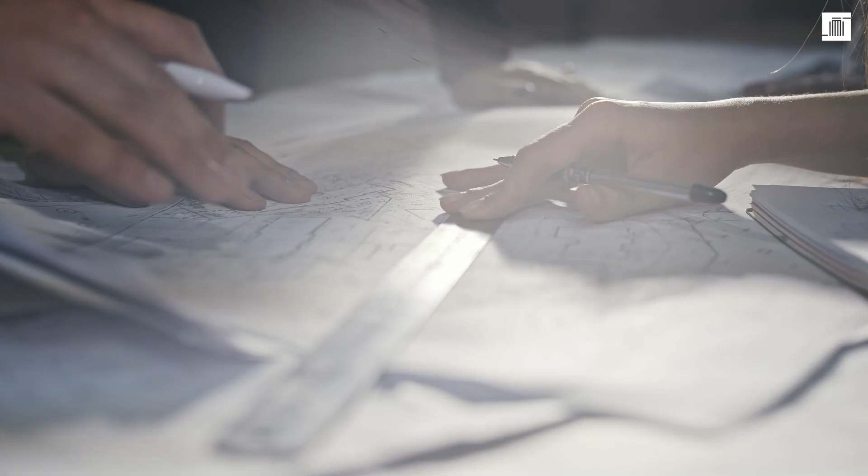The main objective of the IMIP project was to design, validate and implement an innovative construction system based on natural bio-based materials, basically wood and cork, to improve the energy efficiency in public buildings.

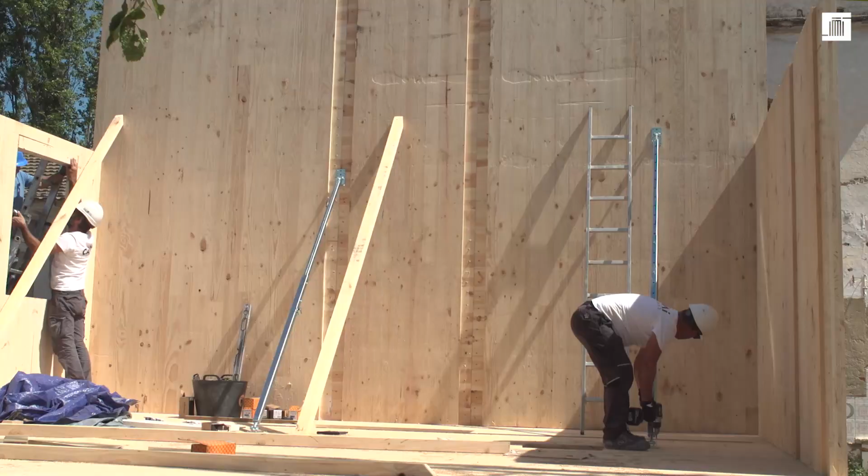Wood and cork are local natural resources whose technical characteristics make them excellent raw materials for construction and rehabilitation. Wood is a lightweight biological material whose industrial transformation and production process emit fewer greenhouse gas emissions than traditional construction materials, but also stores atmospheric carbon.

Wood species available in the Sudoe area for manufacturing construction products are generally softwoods, especially several pine tree species, but the most common one present throughout the region is maritime pine, Pinus pinaster. Pinaster pine is a fast-growing variety, so regeneration of the territory occurs quickly. Therefore, it is a moderately resistant wood.

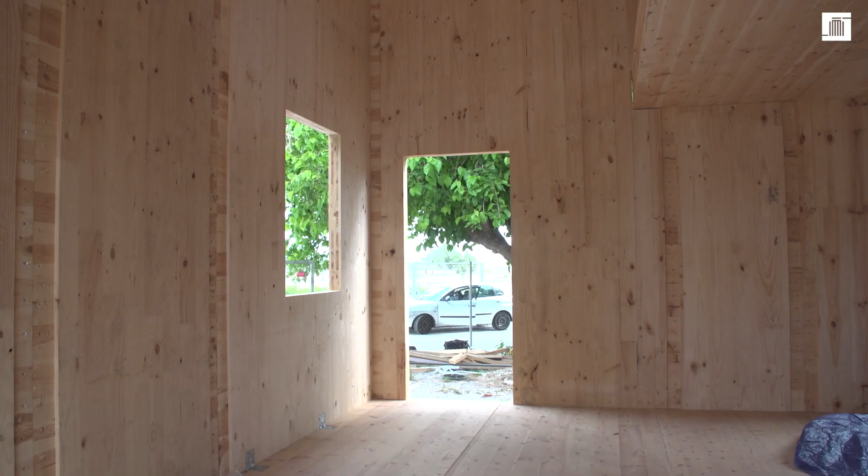One of the objectives of the IMIP project is to develop the possibilities of this forest mass. On one hand, this wood will be used due to its rapid growth and extension. On the other, construction systems are developed with less wood, using technologies to provide this system with high performance.

Cork is a natural and renewable product that is present in Portugal and some regions of Spain and France. It is commonly used for stopper manufacturing, but also for the fabrication of building products with different processing degrees, such as thermal or acoustic boards or granulated products.

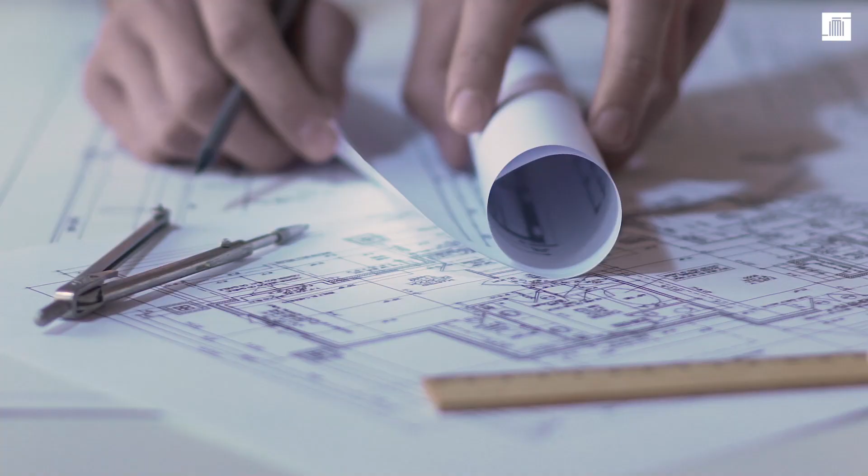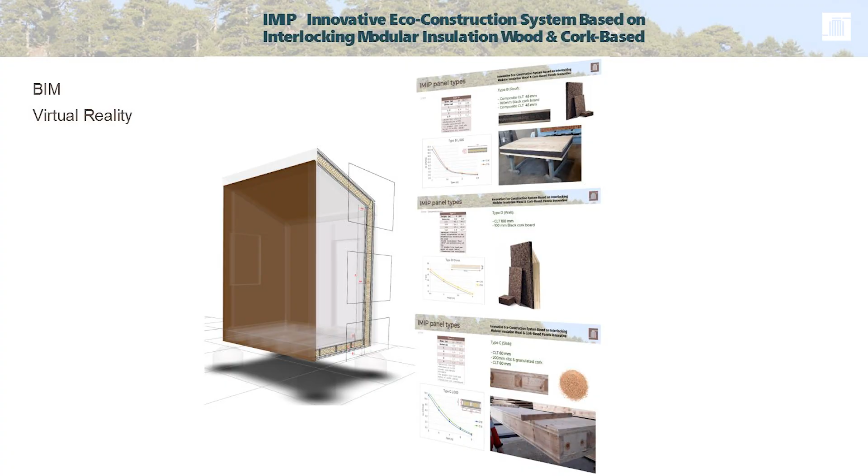Based on these facts and opportunities, the project consortium, formed by 9 partners and 3 associate entities, has created a wood-based construction system that takes advantage of the low-cost wood available in the regions for the creation of a product with higher added value compared to those currently being produced by the industry, such as wooden pallets for goods transportation. It's characterized by its low environmental impact basis while being fully compliant with building construction standards.

It is in accordance with circular principles. It is based on renewable materials and it can be disassembled, reused, and recycled.

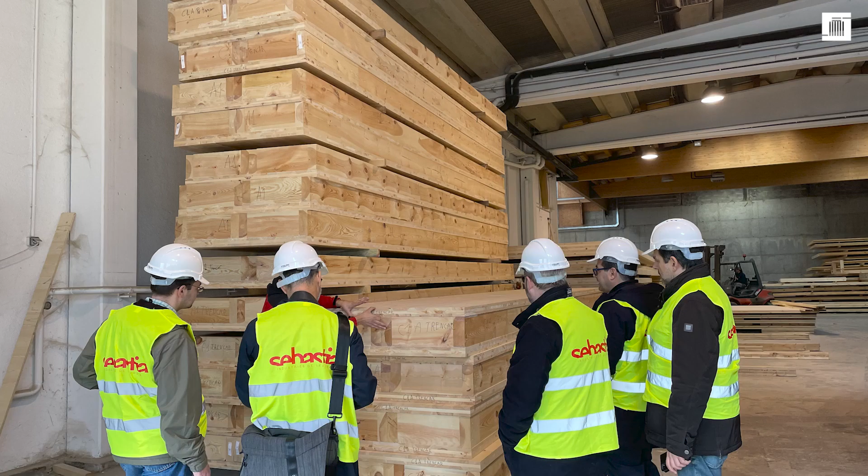The construction system developed consists of different types of elements, vertical and horizontal, with different functions, partitions, and structural elements, and with different parametric compositions. The products developed include slabs, covers, walls, and sandwich panels.

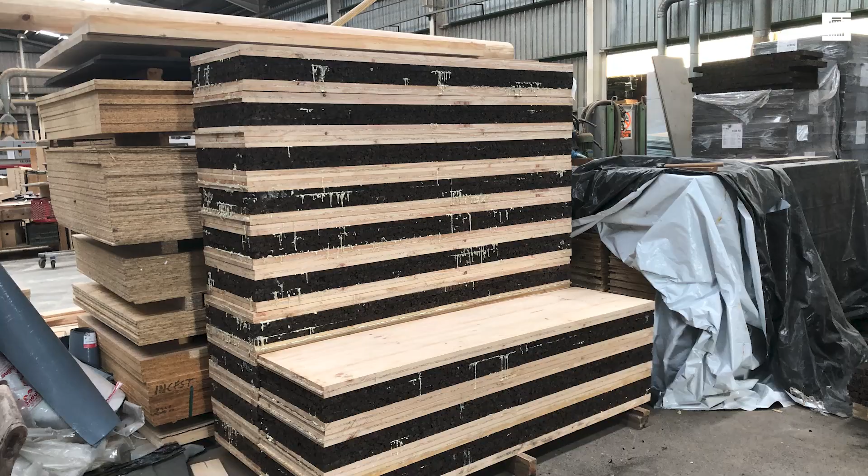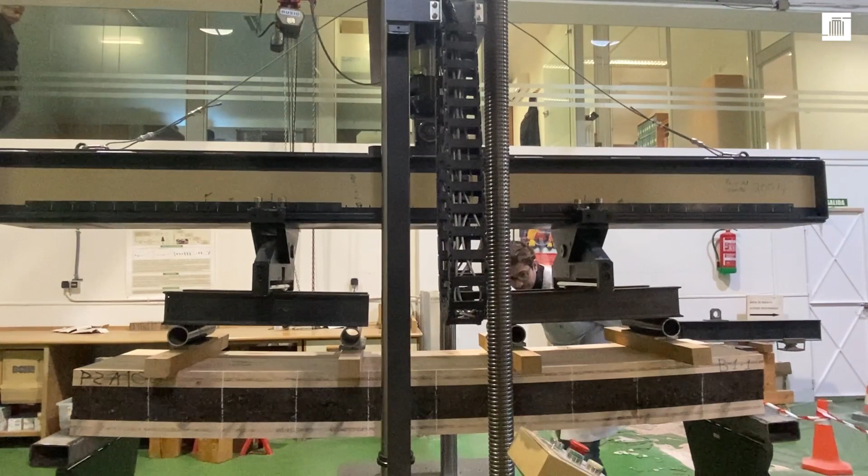The elements developed are characterized by their lightness, their high performance, and low cost because of the material used, low-quality wood and cork-based insulation, and are fully compatible with existing products on the market.

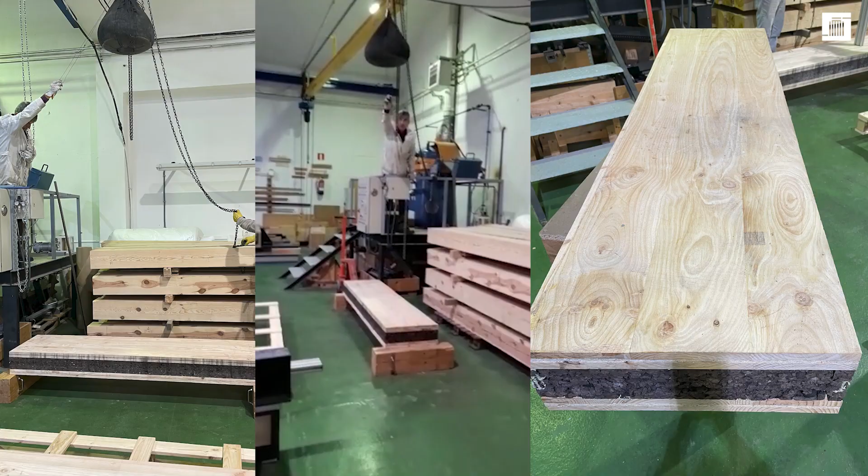Prototypes of these elements have been manufactured and tested in certified laboratories to determine their structural, acoustic, thermal, and fire resistance, and to verify their durability and dimensional stability, thus providing all necessary data for their later use by prescribing technicians, companies, and public administration in the development of projects.

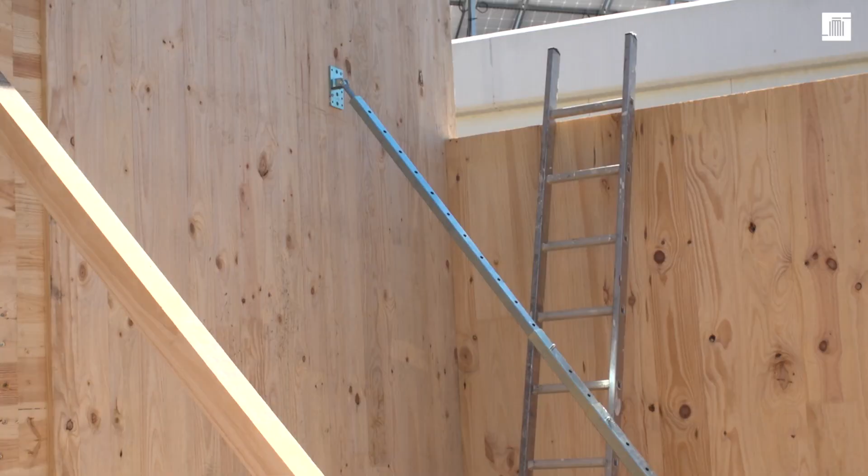In order to demonstrate the feasibility of the IMP construction system, 4 pilot experiments have been carried out. 2 small buildings have been produced using the elements designed and tested.

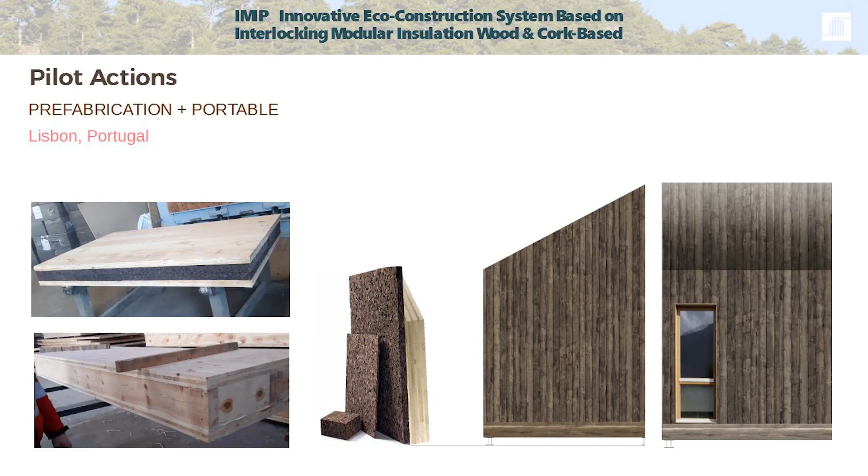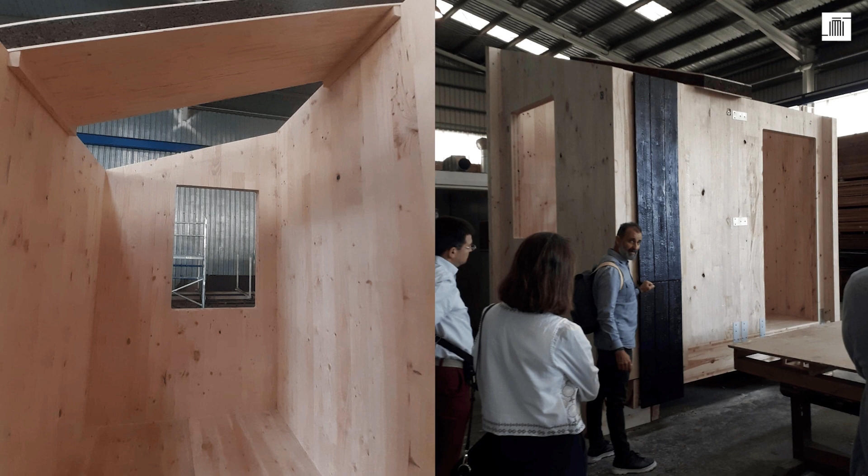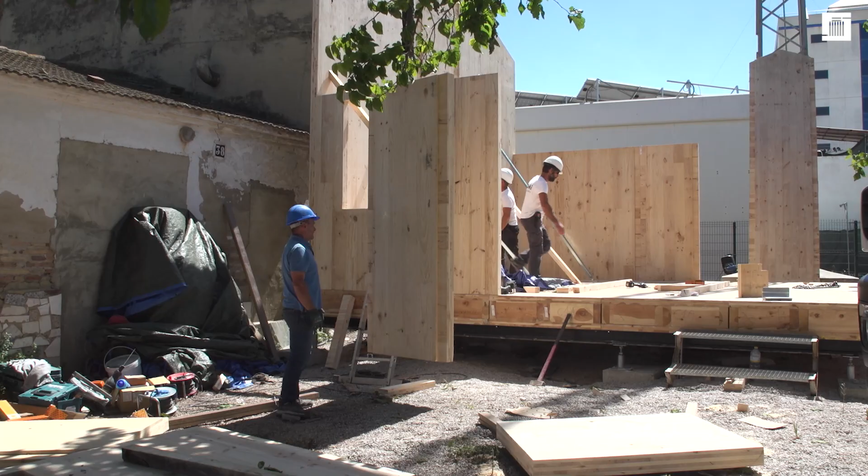The first pilot is a small construction designed for emergency situations, which can be easily assembled, disassembled, and transported. To validate this fact, the project has managed its installation in Lisbon, Portugal, and its later disassembly, transport, and reassembly in Valencia. The second pilot is a 2-story structure built entirely with the interlocking modules designed in the project.

Both buildings have finally been erected on the campus of the Universidad Politécnica de Valencia.

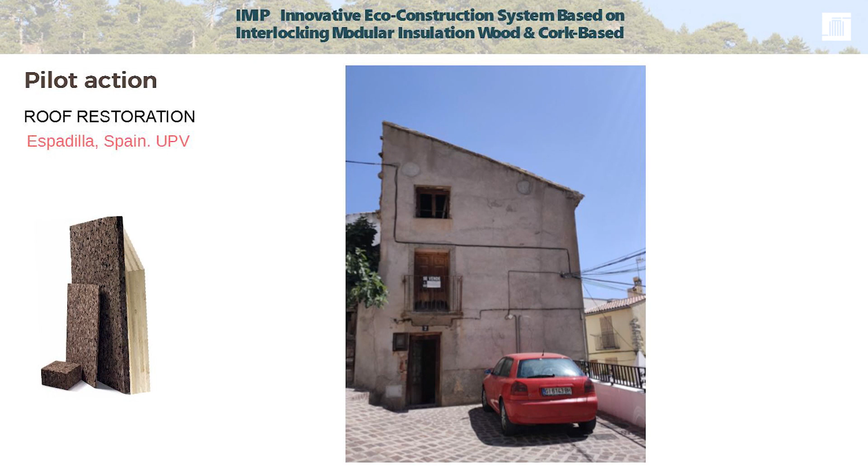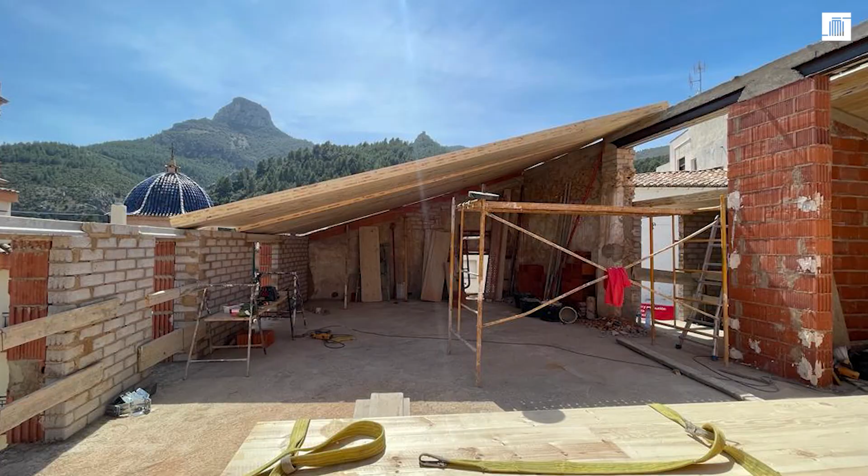The third pilot experience consists of a renovation of a residential municipal building in Espadilla, Castellón, where the existing roof based on traditional construction materials, which was in very poor condition, has been completely replaced by IMP roof panels. This has made it possible to confirm the compatibility of the IMP system with traditional building systems and materials, and its potential for use in rehabilitation of buildings.

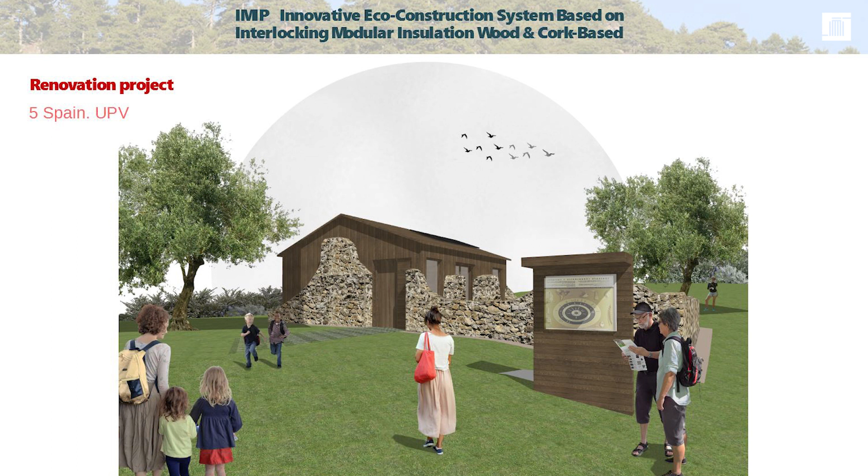Finally, a virtual reconstruction action of an abandoned rural ruin has been carried out, using panels combining the IMP construction system with the existing ruins of an abandoned rural construction.

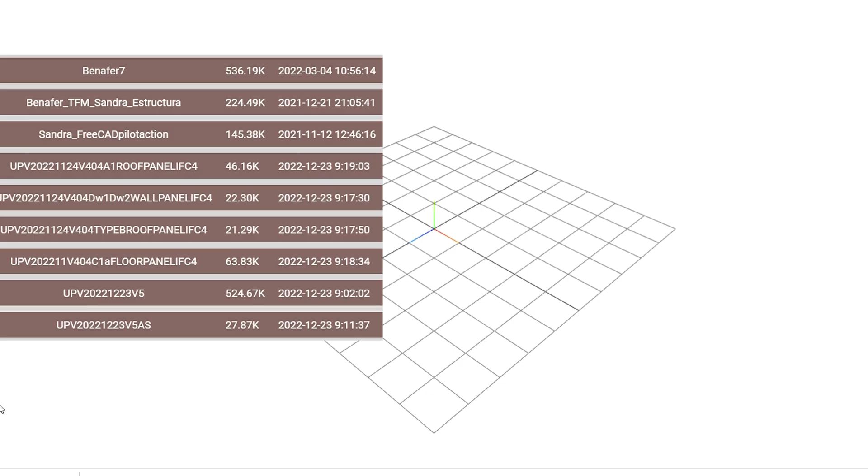With this last action, we have shown that it is possible to intervene in a prefabricated and industrialized way to optimize execution times, economize on processes and budgets, while sustainably rehabilitating buildings in their different states of conservation.

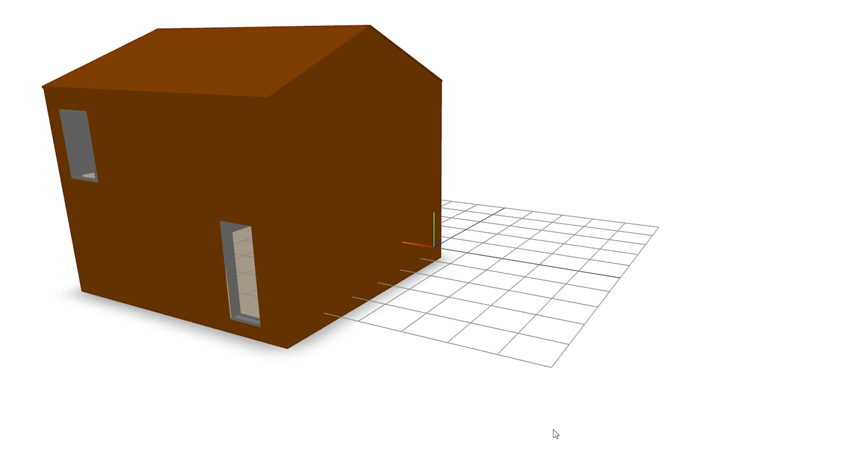Additionally, a web-based application has been developed which, based on the BIM methodology, makes it possible to obtain energy and environmental analysis of building elements.

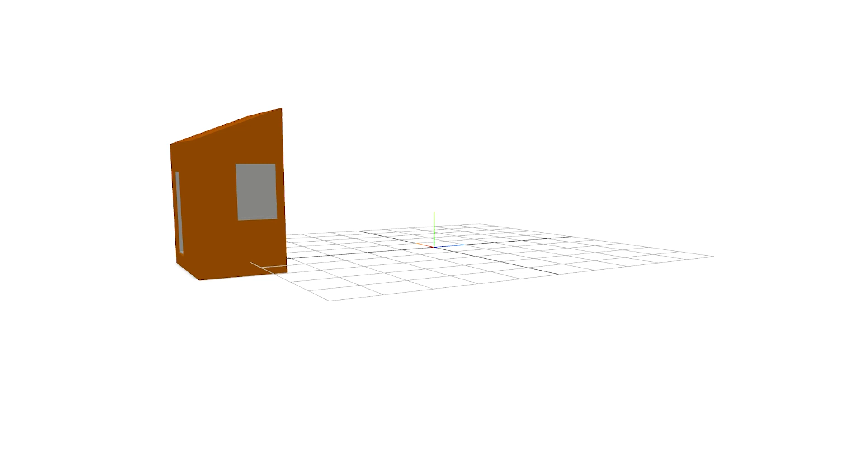The web application allows the import of BIM models in standard IFC format, as well as the visualization and interaction with the geometry in a web environment, in order to subsequently export the models to specific calculation tools.

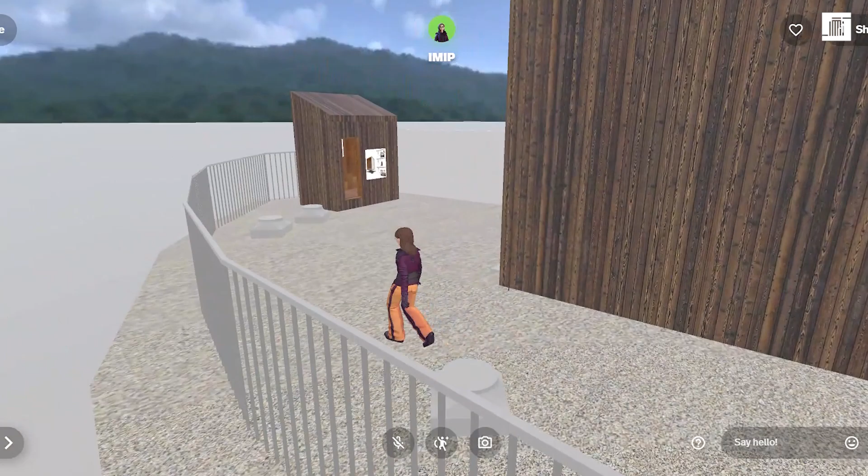This way of projecting reports very valuable information in relation to the impacts and energy efficiency of the buildings during its design phase, which speeds up decision-making when it comes to improving its benefits by adjusting the parameters of the system, both at the level of insulation and resistance of materials, in structure and construction values.

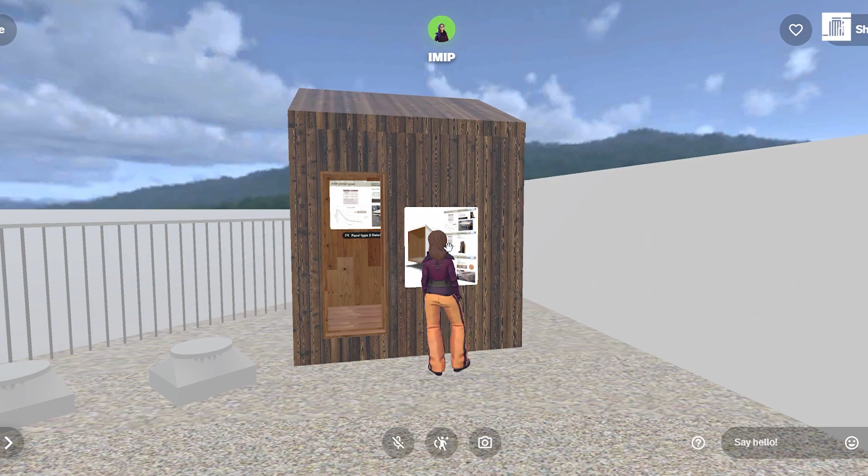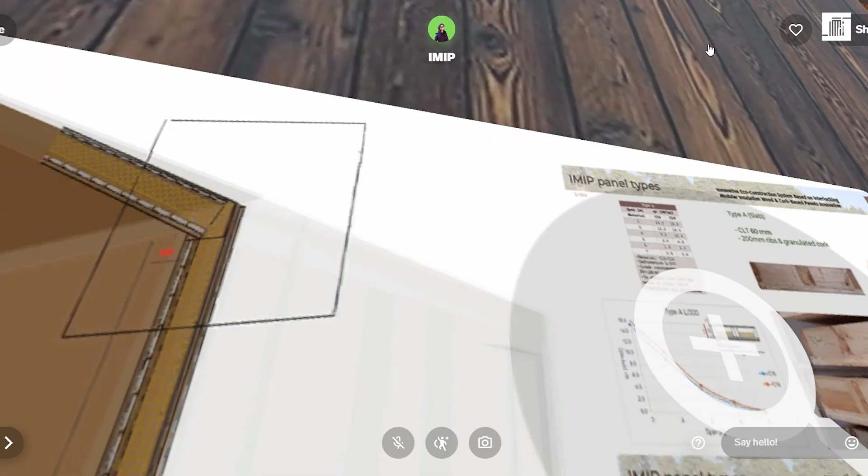Starting from the same BIM model developed during the design process and through standard export files, a work phase has been implemented through an immersive virtual reality application that integrates the user with a 3D visual spatial model of the solutions developed. In the IMIP project, the objective of this work mode is to facilitate a better visual understanding of these solutions.

The application is also interactive, where the user can interact directly, virtually and in real time, with the prefabricated panels indicated above and with the building in which they have been installed.

This new virtual world and metaverse establishes a new work platform where remote work meetings with multiple users can be held, as well as being used to determine changes at the spatial level and adjustments of the details at the construction level.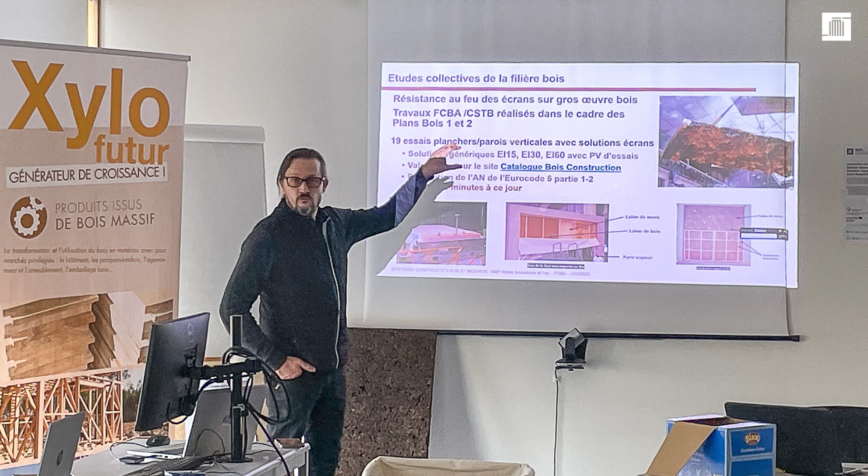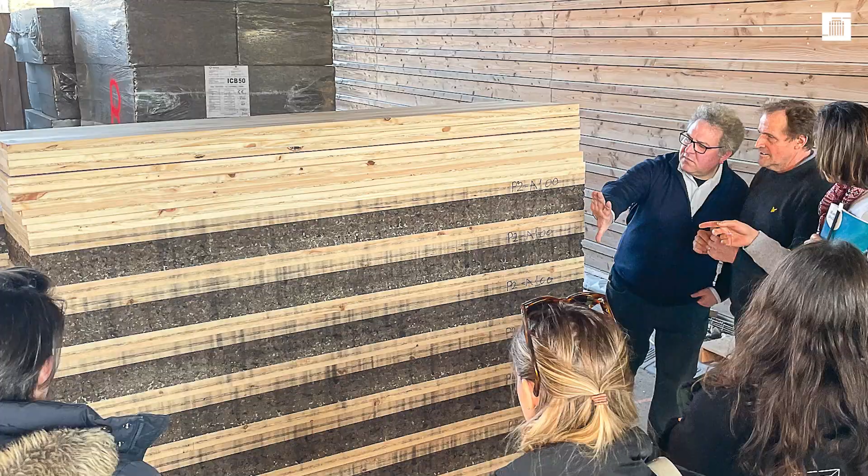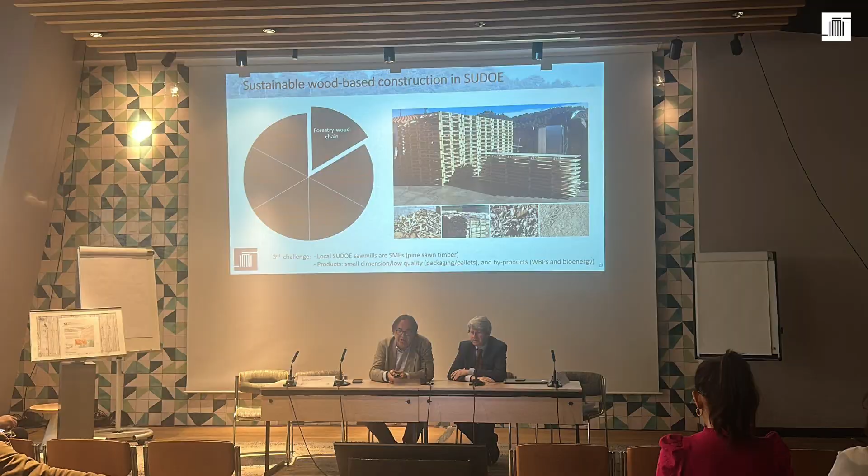In order to maximize the impact of the results obtained, different activities have been carried out to transfer the knowledge acquired to the main interested groups, including the scientific community, society in general, professionals in the sector, architects, engineers, builders, carpenters, and political decision makers.